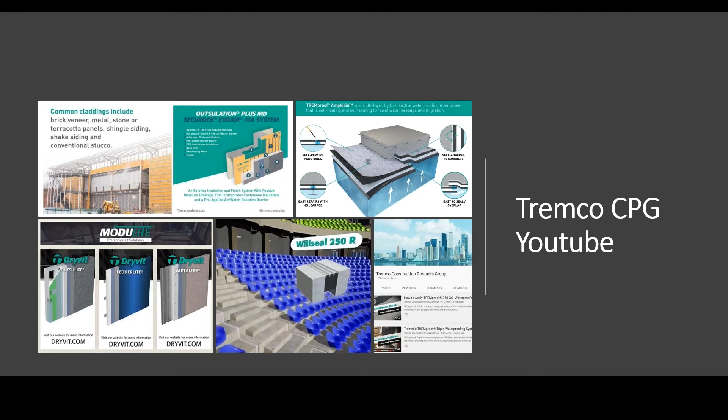Additionally, when we think about education, that's what really brings me back to the whole idea of our building science laboratory. There's lots of opportunities when we're looking at building science and how we can do different types of testing and evaluation. So this is something that we really want to be able to do. We want to be able to partner with you.

We want to be able to work with you in terms of what types of connections do you want to validate. We're going to walk through a couple things here with these slides about just that. Are there opportunities for us to engage? And what's most important is that the learnings we find during this type of testing, we go ahead and share with the industry. So you're going to see a couple things where we did just that.

Whether it's coming in to do a time study, coming in to validate your crew so that they understand the sequencing of installation, coming in to learn about the products, coming in to validate that connection you've always wanted to know a little bit more about, or maybe it's that whole project team coming in to validate exactly how we need to install and detail all of the facade anchors.

That's what we want to be able to do - open up this facility. It really is a collaboration spot. And if we need to validate that from a third-party perspective, we're going to invite those testing agencies in as well. So certainly want you to feel like this is something available to you to come and work. Now, many of you watching today have either toured or done testing with us. That's just another great opportunity for you to be able to share on Tremco Live in the future. So just another way we want to be able to provide that education for the industry, but also give you the means and methods to share what you actually experienced.

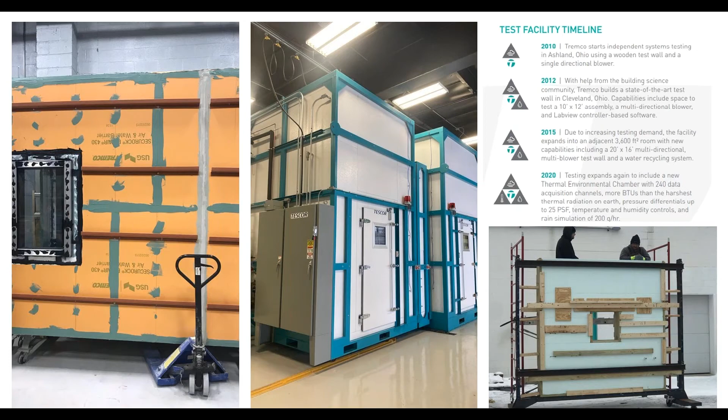We've always been able to do the air leakage testing. So many of you have come in and maybe validated a specific assembly. When we look at those specific assemblies, we'd love to be able to look at the impact of how we detail that window or how we detail that roof to wall connection. How are our systems impacted every time we mechanically attach anything after we've installed that air barrier? That's what that air leakage testing is able to provide us.

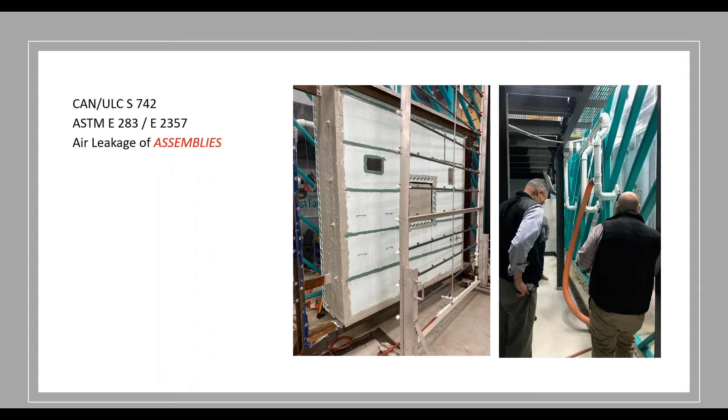We might want to build one assembly, we might want to build six assemblies. So whatever it is that you want or need in terms of educating yourself about maybe the limitations, or of course what's most important, the detailing - that's what this facility is there to be able to do.

And of course, after we do that air leakage testing, we also want to be able to validate it for water penetration testing. Now that's going to be able to start to pinpoint once again maybe that specific situation on that assembly that we need to further identify and validate.

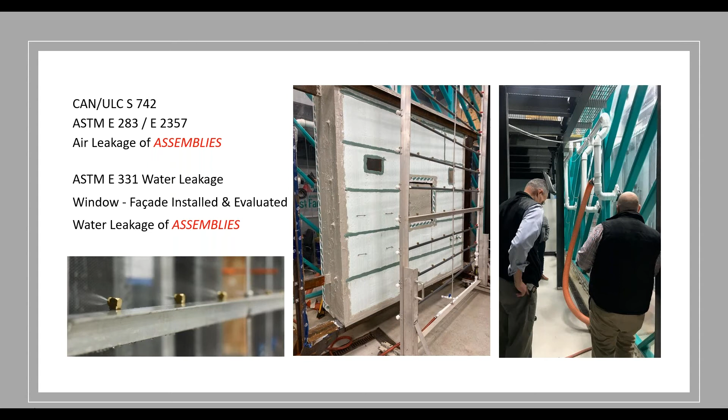Now, what's really cool as well is when we're doing this type of work together, we're able to sit there and start to troubleshoot, or we're sitting there able to go above and beyond. So if we have to do something at 300 pascals of pressure, we can ramp it up, we can go up much higher than that. So that's the kind of collaboration we like to see and talk about. We can sit there with all of you, we can talk it through and decide what really is the challenge that this assembly is going to face, and how do we go about validating it so that we can feel that much more confident and comfortable when we're out there building these buildings, knowing that they're going to continue to perform long term.

I put this in here as well. If you guys are familiar with International Building Code, the performance requirement of that water penetration testing, which is ASTM E331, talks about making sure that whatever we test is representative of the intended end-use configuration.

So what does that mean? If we're going to change the window detailing, the type of window, or the facade anchors, we need to make sure that whatever we're testing is actually going to mimic exactly what we're going to see on that project. Otherwise, the data we get from that test isn't going to help us much. If we change the threaded fastener, the sequencing, or anything in terms of that building's composition, we want to understand the performance that could be impacted by that change.

The other note there is that 6.24 pounds per square foot of pressure differential, equivalent to 300 pascals, is what's required. When we're working together, we're going to go above and beyond that. Why? Because at a higher pressure, we might start to see a mode of failure that wouldn't occur, or wouldn't be identified to us through other means or methods. We want to make sure that if we're going to have an issue, we identify it early so we can address it when we get to that project.

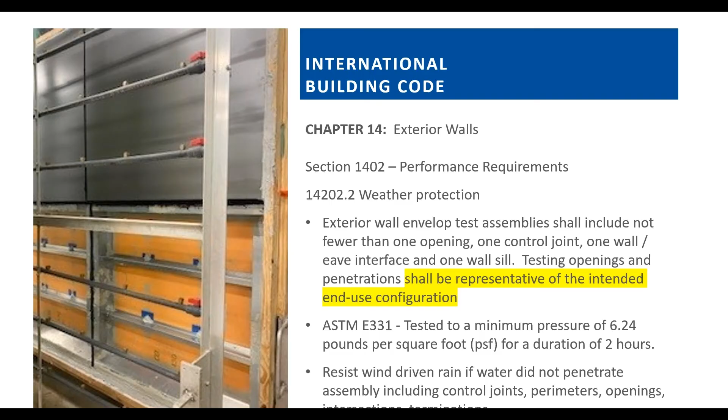This here is just a quick video I've inserted, showing you how we did just that on a project. You may not have been able to witness something like this in the past, so we wanted to make sure you can see exactly what that means in terms of being able to really understand what we can do here from a customization perspective.

Hang on here, it looks like I lost what we were doing. Here we go. You gotta love technology, right?

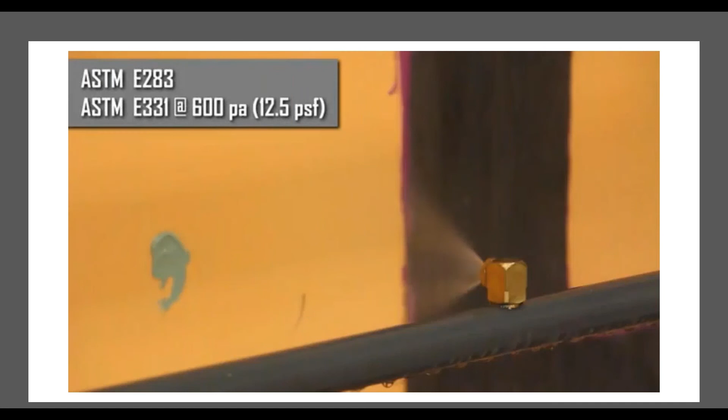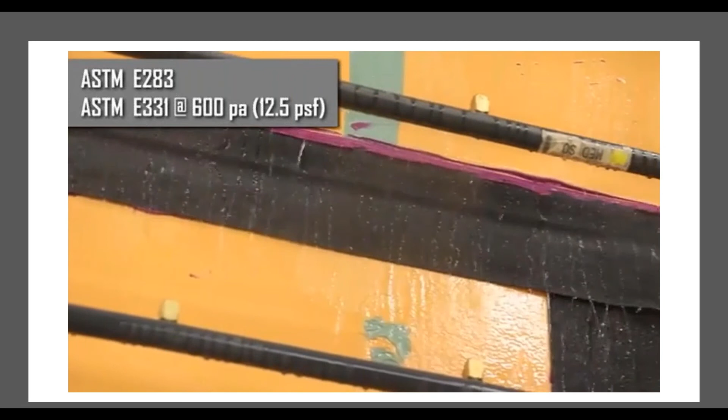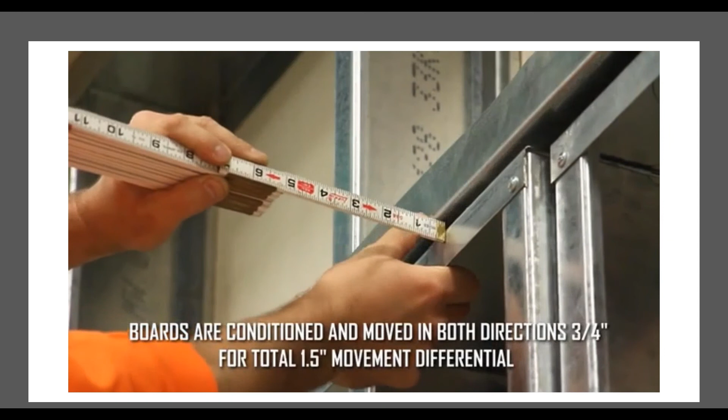So what you're going to start seeing here is what we did for a specific project. This project's performance concern was handling seismic movement. We wanted to make sure we were able to construct an assembly that would allow the entire design team to have peace of mind that the accessories, the sequencing, and the installation were going to be able to perform in that type of condition.

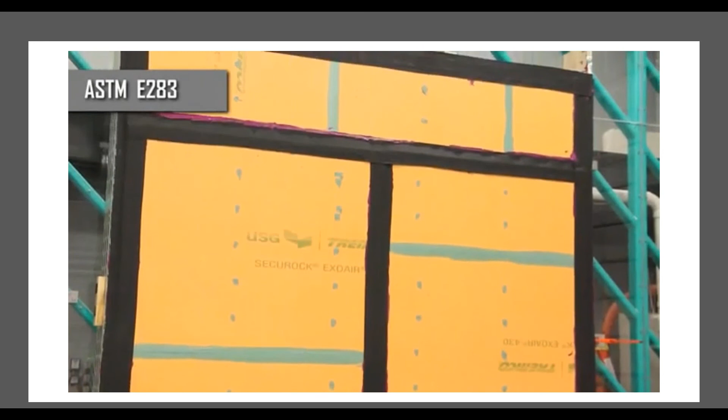So you can see that movement we were able to put into the assembly, to have that free movement, both in unison or separately, in terms of being able to have that negative and positive pressure, really putting that accessory you can see there to the test.

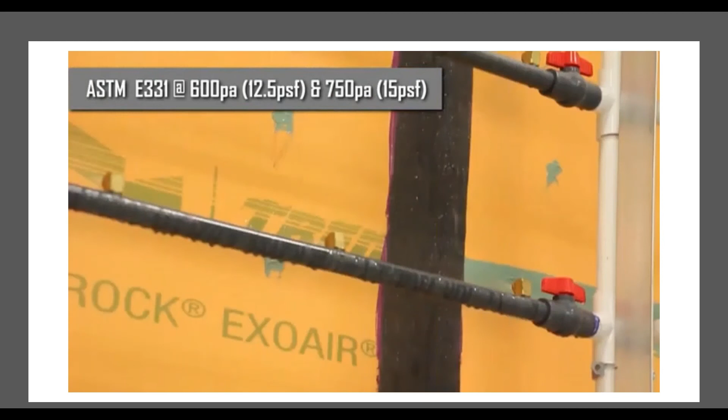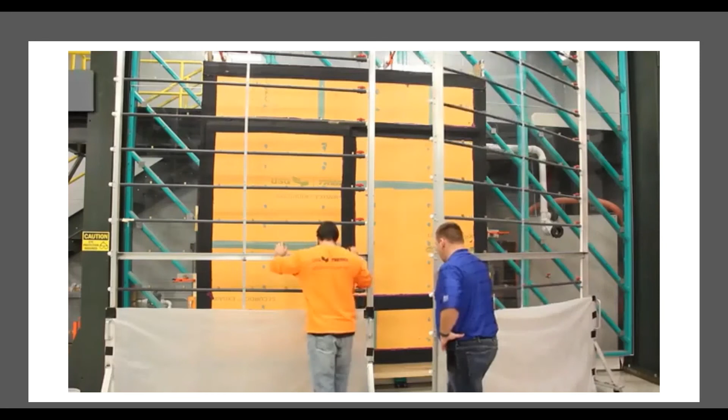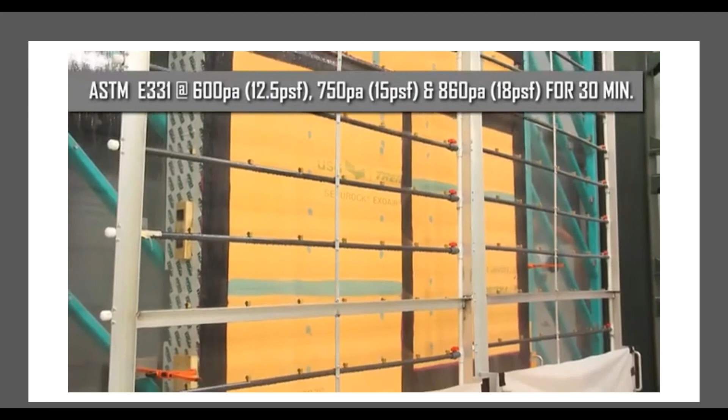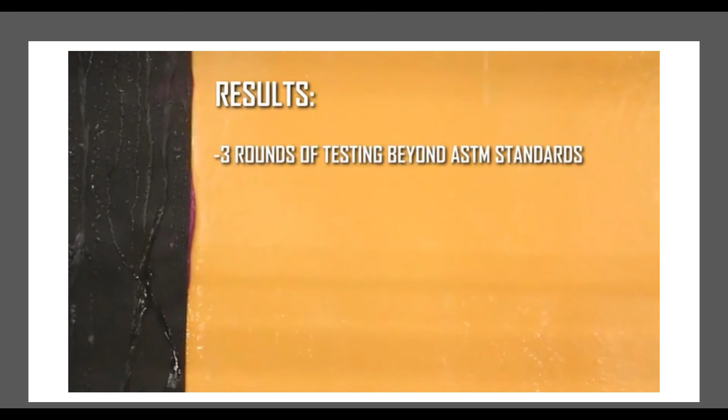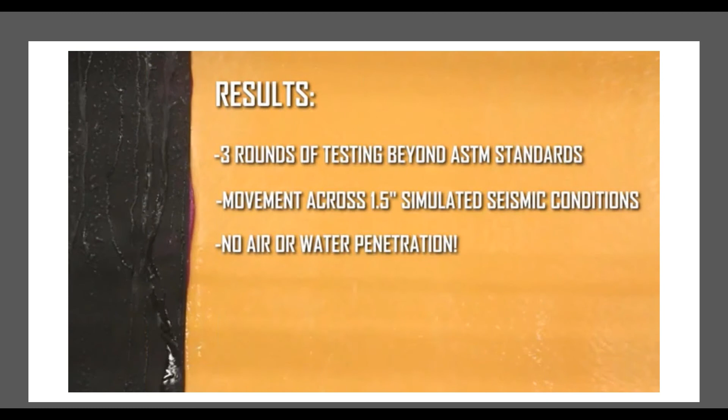What did that do for us? That allowed us to secure that project, and it allowed us to provide peace of mind for the entire design team from a performance perspective. That's what we're talking about when we talk about working together and having this ability to educate ourselves and everyone involved on that project. Here's just a recap of that.

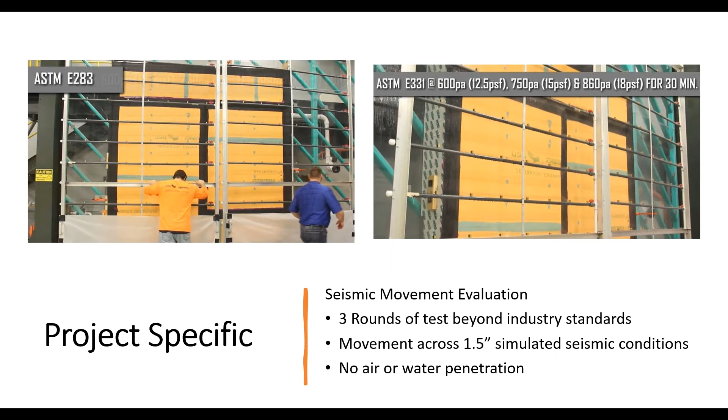We did the air leakage testing, which is the ASTM E283, and then we did the water penetration testing up to that 860 — three rounds of test. We simulated an inch and a half of movement to show that seismic condition, really showing the ability of performance through deflection, and we didn't have any issues.

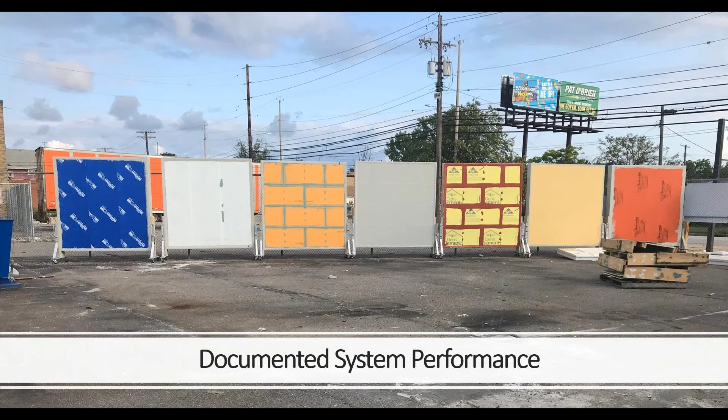Additionally, if you have different ideas in terms of education and want to validate different systems, we can do that. This was another study we did over a 12-month period where we conditioned these materials outside during Cleveland weather for 12 months, pulling them back in and doing what you just saw in that last video, validating for air and water leakage performance, then seeing what kind of impact that could have on overall performance.

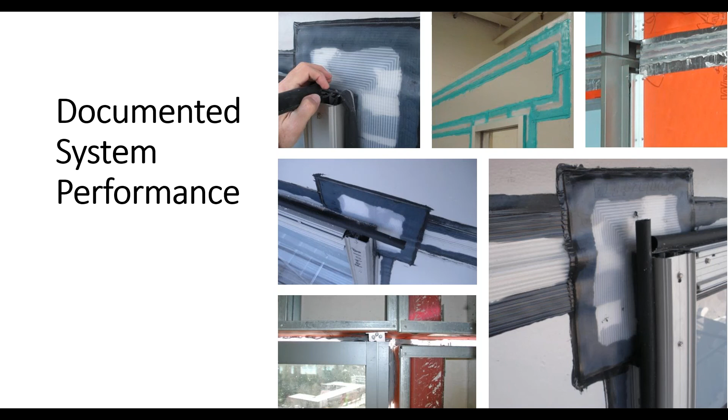We're currently working on another documented system performance study related to Arcadia windows and whether or not specific detailing is needed on that head-of-wall area. So look for that coming in the future.

And we always enjoy looking at project-specific things, then taking what parameters you want and going into that. So in this case here, we went up to 25 PSF.

So throwing a lot of numbers at you right now, but that is 4 times higher than what's required, which would mimic about 100 mile per hour wind. And of course, this is directly on the face of that membrane, where normally in installed condition, you're going to have a facade giving it some sort of protection as well.

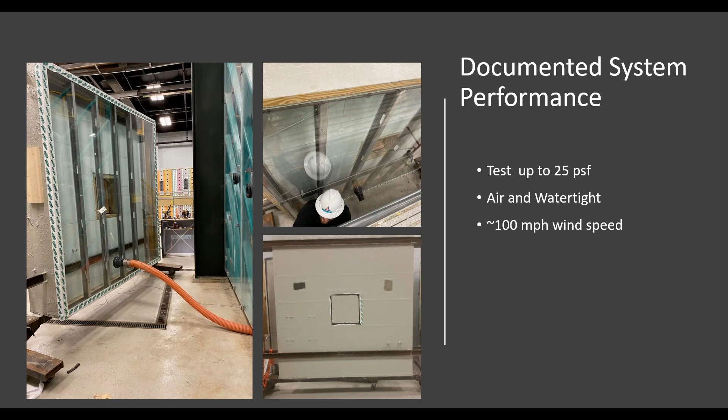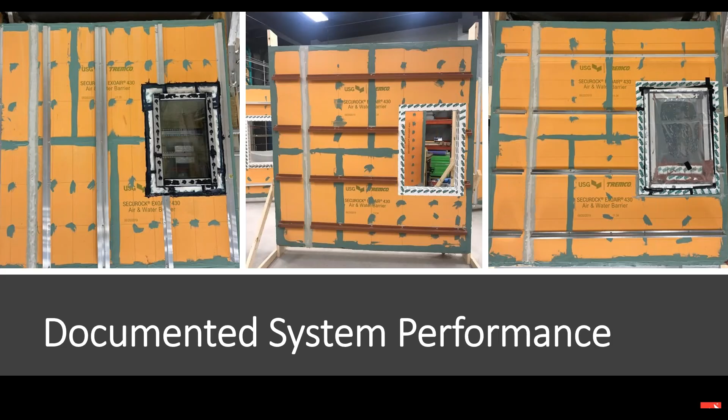But these are the things we want to be able to do: work together, educate, and really figure out what we need to draw from it in terms of learning. Here's another example of a variety of different assemblies that we did, and a paper was produced from it. David Schoenhardt is someone we've worked with in the past. He's presented information at IIBEC, and we're going to start working with him on a couple other types of further tests, but this is the kind of thing we want to be able to do.

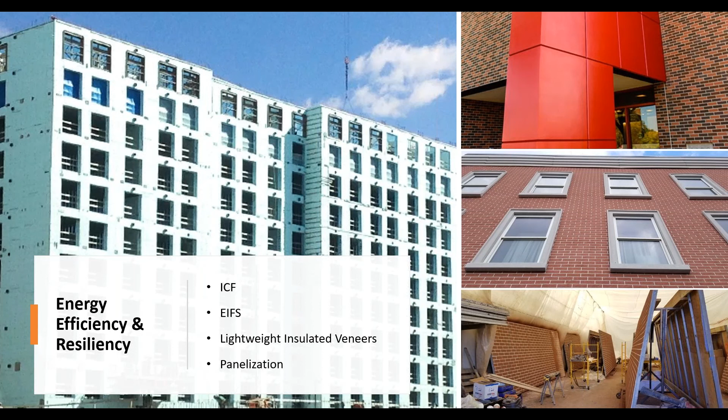Now, not only are we handling that air and water leakage, we're going all the way out to that facade and really performing from a holistic perspective what those performance needs and demands are on that entire assembly. With that, it brought to us that further need or desire to take our testing to a whole new level, and that's where we bring in this thermal environmental chamber.

This is where we're able now to not only test for air and water leakage, which we've already discussed, but now start to look at that thermal resistance, thermal bridging, or overall thermal mass of these assemblies and how they all come together. So we're going to be putting together a variety of different assemblies, being able to go out and educate people on those differences.

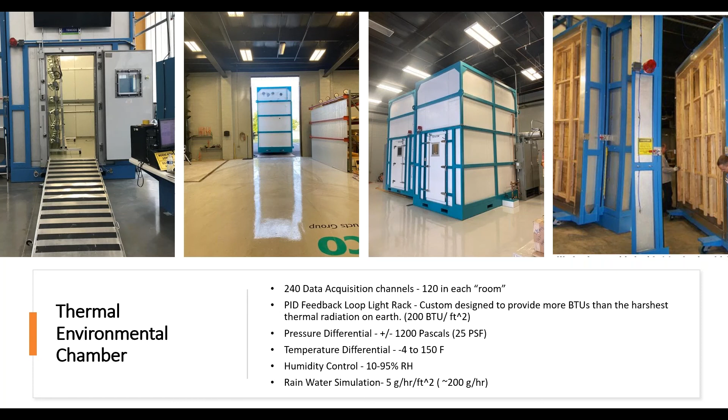If you're using different types of mechanical attachment, what is the impact of different types of facade anchors, not only from an air and water leakage perspective, but what does that do from your overall thermal resistance of everything all coming together? Pretty excited about all of that and more.

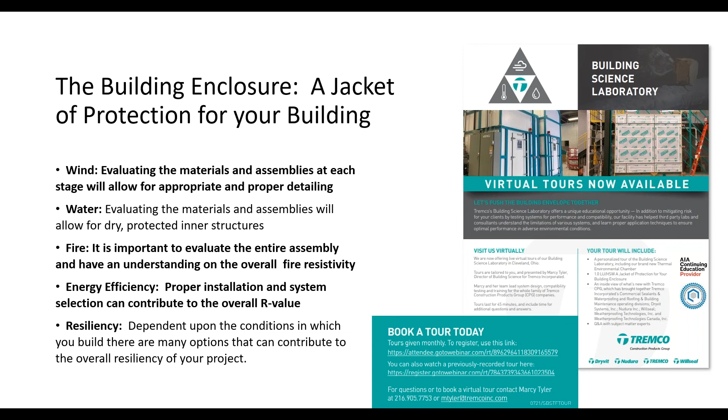Totally dedicated in this new year to bring education to the industry as much as possible. So let's make sure that we book that tour as soon as possible and get that education and that cooperation and collaboration going as soon as we can.

Speaking of education further, we've got a couple more things coming to you, not only this month, talking about new things, but in February, we're going to be really dedicated to educating via some of the things that we already have that exist, but we also want to hear from you about topics that you haven't seen out there in terms of content, right? So if you want to know more about a specific area, maybe you haven't seen that content delivered by anybody else, please reach out to me so we can provide that.

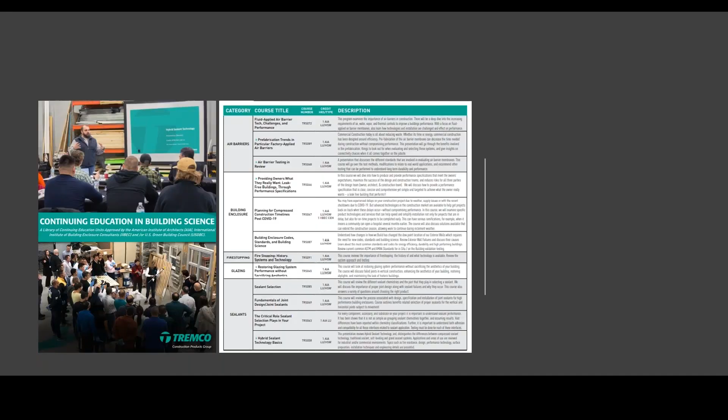Next up on our education journey here today is if you want to request a specific AIA training. Once again, loving education in this new year, really wanting to bring that out to as many people as possible. We have a lot of great feet on the street that can bring that information, or I can as well. If you click on that AIA training or continuing education training, you're going to get this brochure. This brochure is great. It's something that you can take a look at for all the different areas of learning that we have available that we can bring to you live.

Maybe you want to start scheduling something with us once a month for your colleagues, and we can start going through this list. I know a lot of my colleagues are doing that right now, kicking off the new year right, being able to provide this content on a regular basis.

Last but not least is our Build Meets World. This is another place and space for you to learn. Not only can you learn about different technologies, different concepts, different types of systems, you can also contribute.

If you're interested in being a contributor here, I promise you it will be a great experience. We help you through every step of the way, being able to provide content for this area. So not only being able to put a voice to it, we can also turn that into a video as well.

We are starting to revamp Tremco Live, pretty much starting today with a whole new look. So we're going to be out in the field a lot more. We're going to change the name. We're going to change the way that we're doing things. So stay tuned for all of that.

We want to be able to bring the Build Meets World to life. So Build Meets World has been something that we have been doing for many years now. So you can check that out by clicking on that link. Go in there, search different topics, and really get a great understanding of the different concepts that are featured in there. You're going to see we have a lot of guest writers as well. So if you have something that you want to share, let us know. Let us get working on it together so that we can feature your concept.